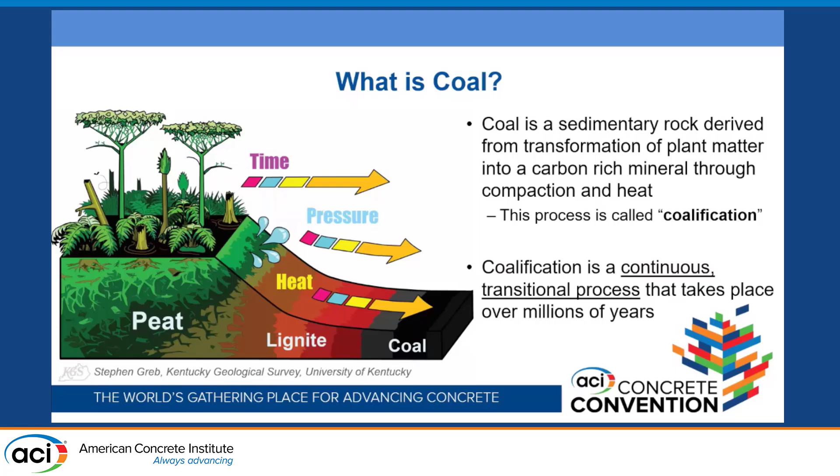The important thing to note about this process is that it's continuous. What I mean is, when you look at coal development, its age and its point in the process of coalification changes the physical and chemical nature of the coal. We break down these different stages into categories called ranks. Lignite is the lowest rank coal, all the way up to anthracite, which is the highest rank coal.

Those categories are defined differently internationally, but here in the US we tend to rely on the coal's calorific value as the determiner of its rank. So why do these different ranks have different calorific values, releasing different amounts of heat when ignited? It's because these different ranks of coal also have different fixed carbon contents. Lignite will often only have 30 to 40% fixed carbon, whereas anthracite can have up to 80%.

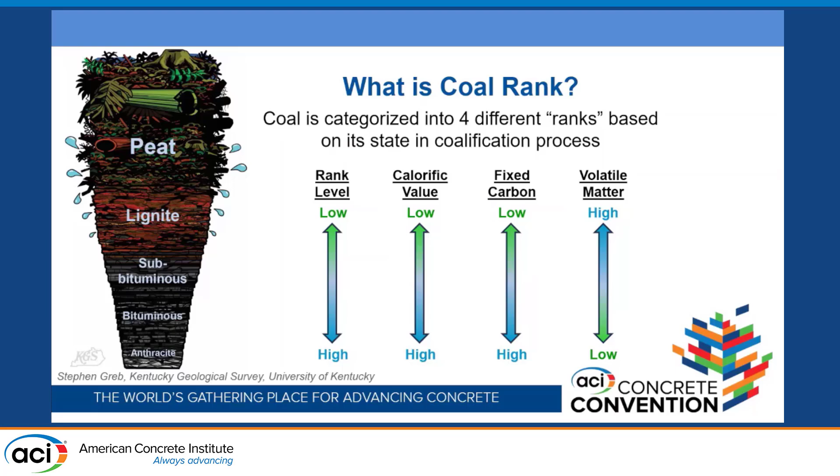Coal is formed through the decaying of organic plant matter, which we understand is carbon. If lignite is only 40% carbon, what's the other 60%? Well, in coal terms, that's often referred to as the volatile matter. But in our world, the term that might make more sense when thinking about coal ash is that coal is composed of the organic component and minerals.

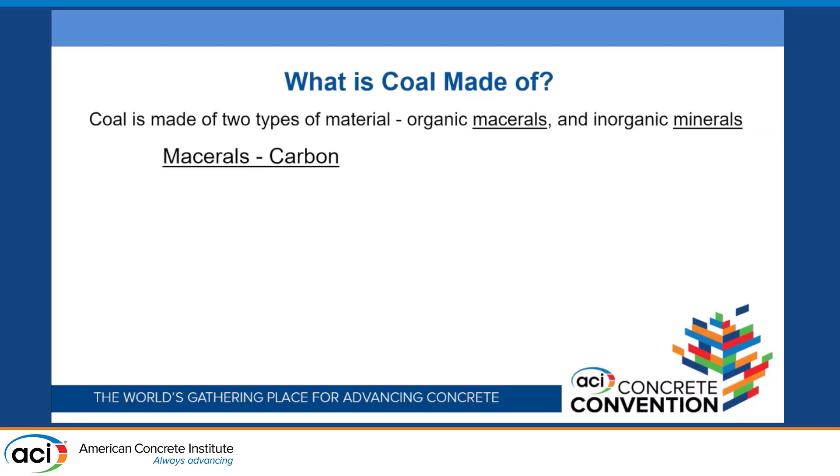The organic component comes from your plant matter—it's the fuel, it's what burns. Depending on what kind of plant matter it's formed from, it has different names and categories. That's interesting, but not useful for this discussion. The minerals are really the important part of the coal to keep in mind when thinking about coal ash.

Those minerals in coal, the non-plant matter part, come from one of two different places. They can either be native to the coal itself, to the coal seam—think of this like the soil that those plants were growing in.

Like the clay in those soils, or the silica that makes up the cellulose within the plant fibers themselves. Or those minerals can be diagenetic, they come from a secondary source. So seawater flooding the peat bogs, depositing salt, notably where chlorides come from, when there are some ashes that have chlorides. Or glacier movements that bring shale and other minerals into the coal seam.

The reason why the minerals are the important part of this discussion is because this is where the coal ash comes from. The minerals in coal aren't combustible, they're not going to burn. So when you burn coal, what happens to them? They turn into coal ash in a process we'll discuss in a moment. And what's particularly important is that the type of minerals that are there, and the composition of those minerals, is the origin of the type of coal ash you get.

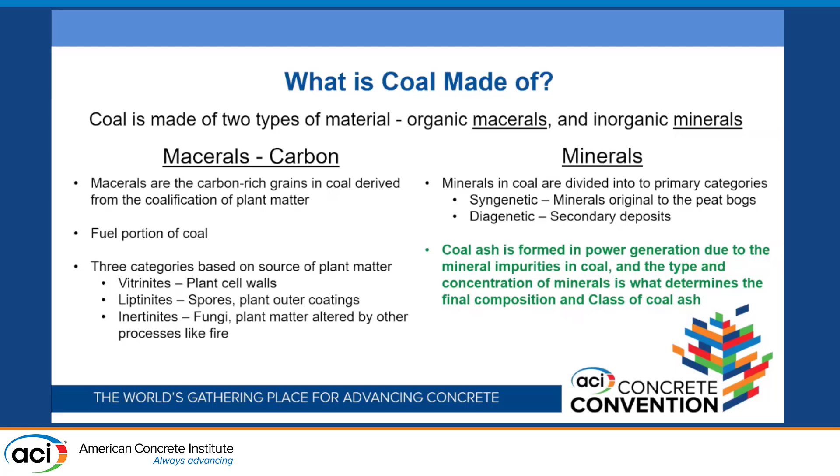So if you have limestone in your coal seam, that's high in calcium, you're going to have a Class C ash. If you don't have any volatile minerals, if you just have clays, the coal will likely turn into a Class F ash. So let's piece all this coal talk together and remind ourselves why any of this matters.

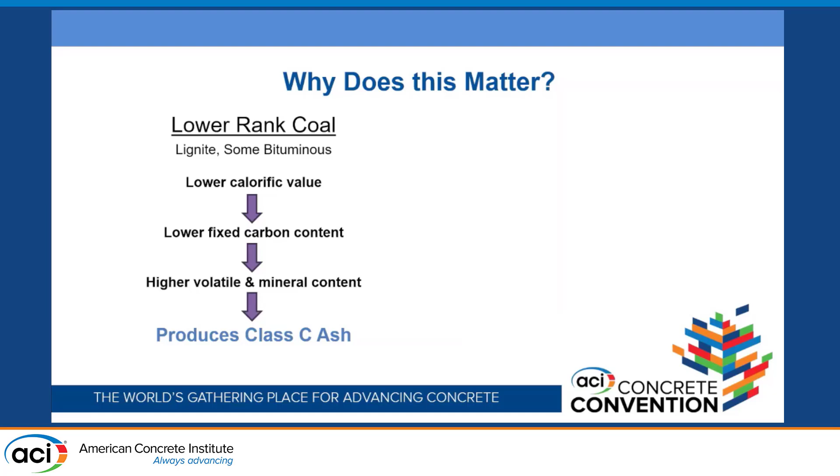If you have a lower rank coal, it's lower ranked because there's a lower calorific value. It has a lower calorific value because it has a lower carbon content. And instead of carbon, it has a higher volatile mineral content. Those coals tend to produce Class C ashes. Class C in our terminology is a higher calcium coal ash. So the calcium is there because it came from the volatile minerals that were there instead of carbon.

Higher ranked coals, like some bituminous and anthracites, have a higher calorific value because they have higher carbon, and because of that they have a lower volatile mineral content. Therefore the ashes produced from them are a Class F ash. So that's the story of coal.

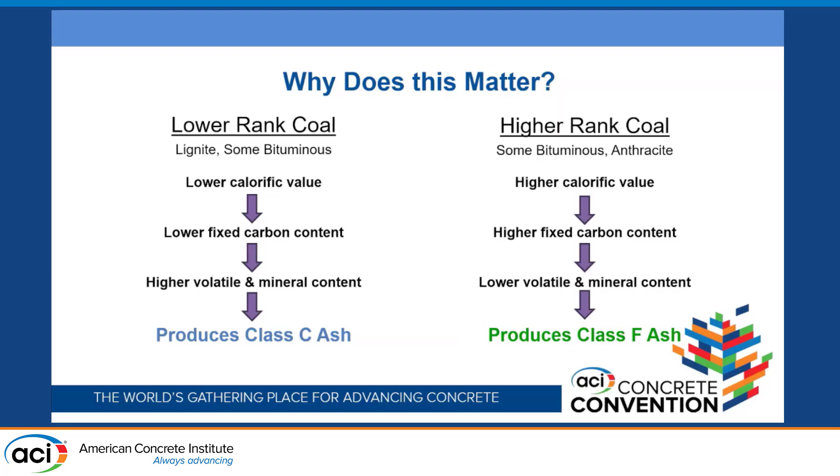Now let's talk about what is coal ash. Well, I started hinting at it already, but let's slow down just a little. So for this, I'm going to reference ASTM C618's definition.

C618 is the ASTM specification for coal ash and raw or calcined natural pozzolan for use in concrete. Previously, this specification was fly ash for use in concrete. As of 2023, this change was made and this definition was added: coal ash is fly ash and bottom ash, resulting from the process of combustion of ground or powdered coal, obtained either from current power plant production or harvested from landfills or impoundments. So a big definition, a lot going on in it.

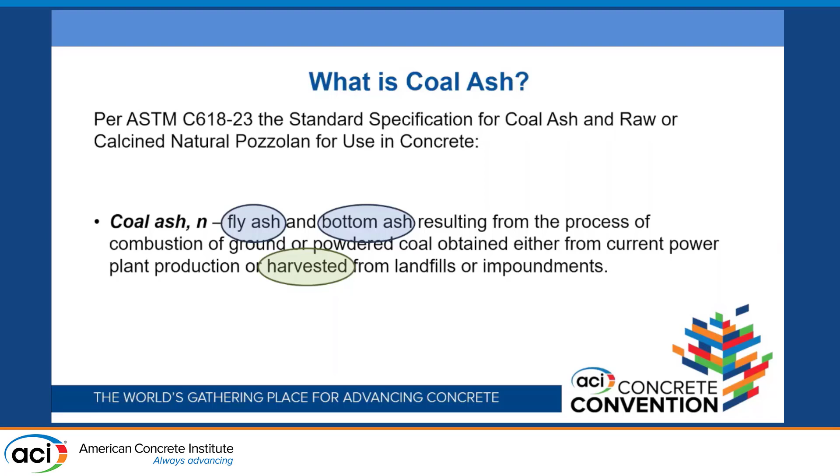Coal ash is now the name of this parent category. Within coal ash, there is fly ash and bottom ash. And coal ash can be used in concrete whether it came from a power plant directly out of combustion or if it were harvested from disposal.

So if we're going to talk power plant and the origin of coal ash, and we're going to talk about fly ash versus bottom ash, and how all of these come to be one thing we call coal ash, we need to talk about power generation.

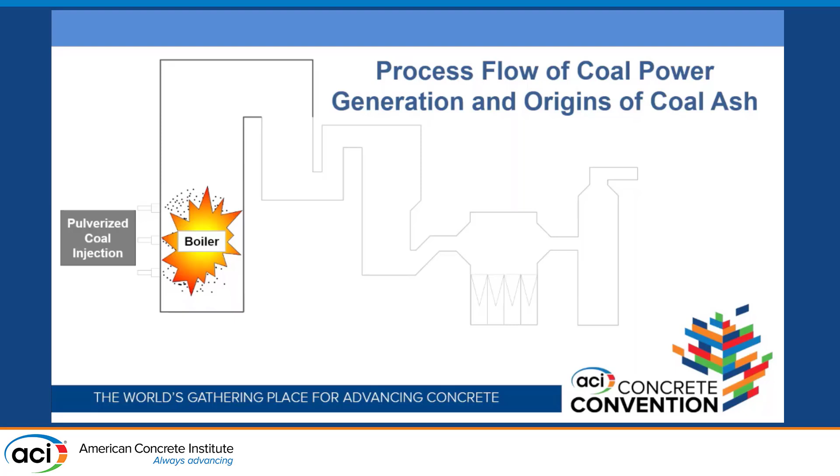Let's see it again. Very satisfying. So this is combustion. We all remember combustion from grade school, it's carbon and oxygen and a spark. You do this to create heat. Why do we create heat at a power plant? In order to heat up water that is in boiler tubes, to turn it to steam, to turn a turbine.

That's power generation, I'll let someone else talk about that. Combustion, for us, we care about what happens aside from the heat. So one part of combustion is creating flue gases, notably water and CO2 are the predominant ones. We all know the concerns regarding CO2 in the atmosphere.

NOx and SOx gases are your other two large categories within flue gases. We're pointing these out because they're relevant to fly ash and coal ash.

What else is going on in this combustion? I harped all about these minerals, right? Some of them volatilize—that's where some of the SOx gases might come from, for example, from pyrite volatilizing and the sulfur component converting to sulfur dioxide. But a lot of these minerals don't volatilize, instead they melt. This combustion is happening anywhere from 1,300 to 1,700 degrees Celsius, so these minerals are melting and fusing in this massive fireball.

So what happens? They melt, they fuse into a glass, floating in suspension. Some of these molten fused glasses are heavy, and so they fall out of the air in the boiler to the bottom. That is where bottom ash comes from. We are very creative in the way we name these things—it's bottom ash because it fell to the bottom.

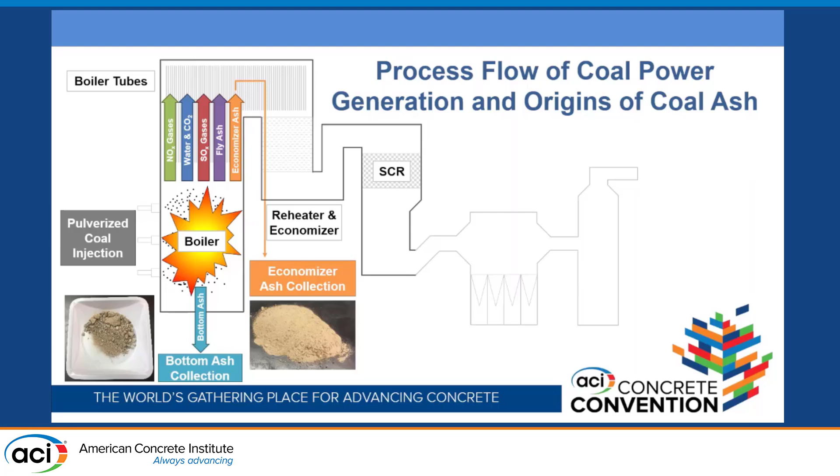Next in our process flow is the SCR, selective catalytic reduction. This is basically the catalytic converter in your car. The point of it is to take the NOx gases and bind them. The way that happens is before the SCR, the utility injects ammonia into the flue gas stream. That ammonia will react with the nitrous gases on the surfaces of the SCR to bind to the NOx.

Why do we care? Some of you may be aware that sometimes ammonia can be in fly ash. There is a C311 test for testing the ammonia content of fly ash, all based on power plant operations. If excess ammonia is used more than needed for NOx removal, that ammonia can end up in the fly ash. I'm pointing this out because sometimes in harvested plants you'll find ammoniated fly ash in certain areas—that is not native to the fly ash, it's a byproduct of power plant operations for flue gas treatment.

The next part is the ESP, which stands for electrostatic precipitators. This is an array of vertical plates that are charged and perforated—perforated so the flue gas can pass through easily, and charged so the fly ash can statically attract to the plates for collection. They're occasionally pulsed, and the fly ash will fall to the bottom. So this is where we get fly ash from.

Now we've got all of our different ash collections: our bottom ash from the bottom of the boiler, our economizer ash from earlier in the system, and our fly ash.

The last part we still need to talk about is SOx removal. There are still sulfur gases in the flue gas at this point. There are several different desulfurization technologies—this is just one, a very common one. It's called a wet scrubber, where the flue gases are pumped through a lime slurry so the sulfur reacts with the calcium to form gypsum, anhydrite, bassanite, calcium sulfite, and a variety of other hydrates.

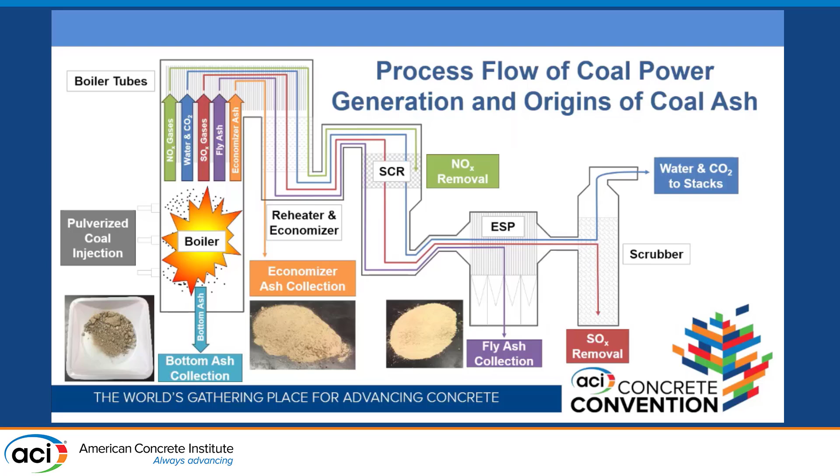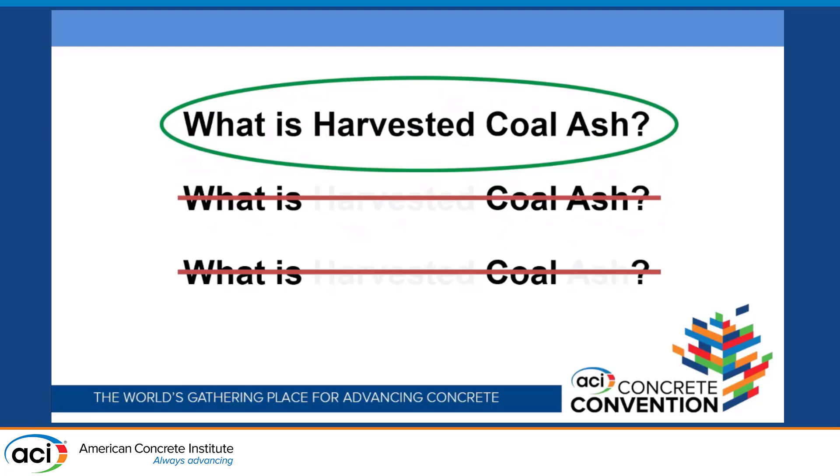So that's coal ash, that's where it comes from. It starts as minerals in coal. Those minerals get injected into the boiler, they melt, they fuse, and they go to different places. So now we can say what coal ash is, what is harvested coal ash.

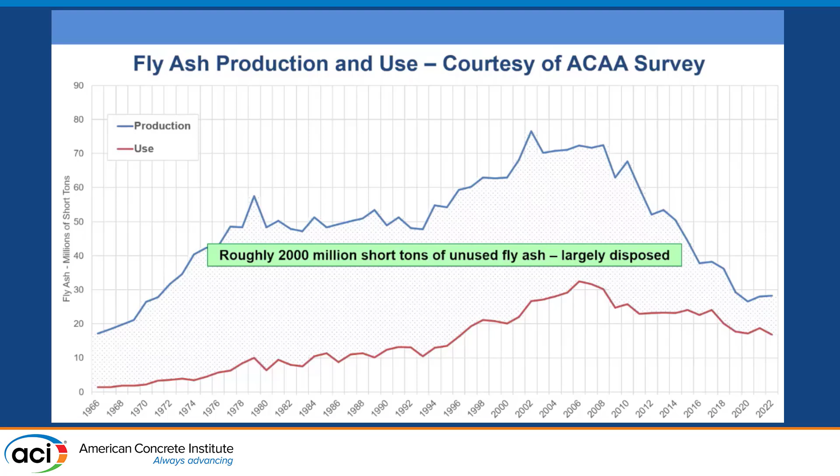This gap between production and use—that fly ash didn't disappear, it went somewhere. Largely it was disposed of in landfills and ponds. There is at least 2,000 million tons of it in disposal. Looking at the red line for how much is used every year, if you're lucky, up to 30 million tons in a year—2,000 million tons will go a long time. So now we're finally getting to the meat of this, about harvested fly ash.

So how is this ash disposed of, the ash that's produced but not sold? Largely in two types of impoundments. The first, often referred to as stacks, is what you'll often just hear called a landfill. In this type of impoundment, the ash is removed from the plant, trucked over to the prepared site, where it's deposited and compacted in lifts. The ash is normally conditioned with about 12 to 20% moisture for dust control and for compaction.

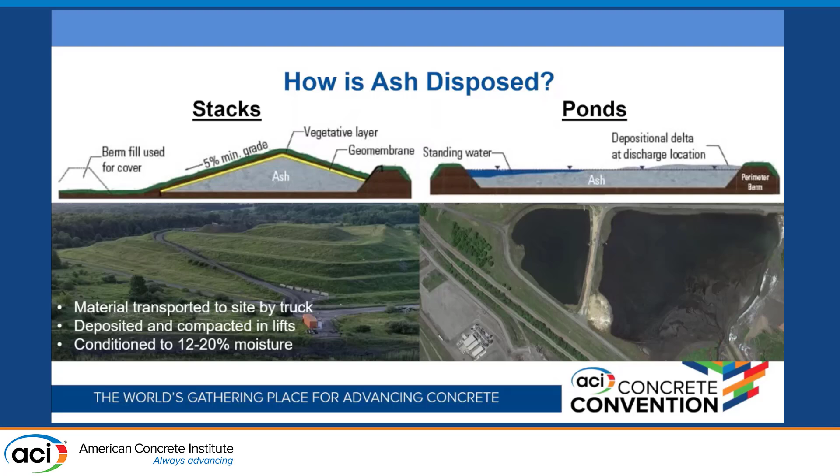The other common option is a pond, where it's exactly what it sounds like. The fly ash is mixed and sluiced with water into a pond, into a pit, where it'll then flow out and settle.

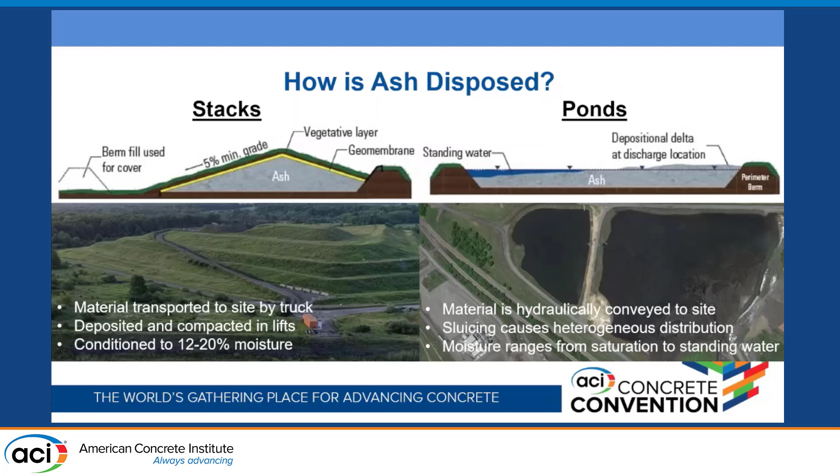That said, what all is in these types of deposits? We already talked about how coal ash is the category that contains fly ash and bottom ash. What else is out there? Well, it's all the above. Depending on the utility's operations, depending on how many landfills they wanted to manage at a time, there are some cases where there will be landfills that utilities decide to only put the fly ash, then a different spot where they only put the bottom ash, and another spot where they only put the FGD solids. But it's also common that there will be commingled landfills.

Here's an example of a landfilled ash. The sample on the left, labeled dried, is just sampled straight from the deposit. On the right-hand side is when we screened it on number 20. You can see there's a combination of materials. The oversize here is a combination of bottom ash particles, or it could be agglomerates of fly ash that, because of the moisture conditioning, bound together. It can be a combination—there could be some gypsum in there too.

We'll hear a lot more from the other speakers about the exact processes used to take material that looks like this and make it better quality. But this is the starting point—this is what we have to work out and figure out.

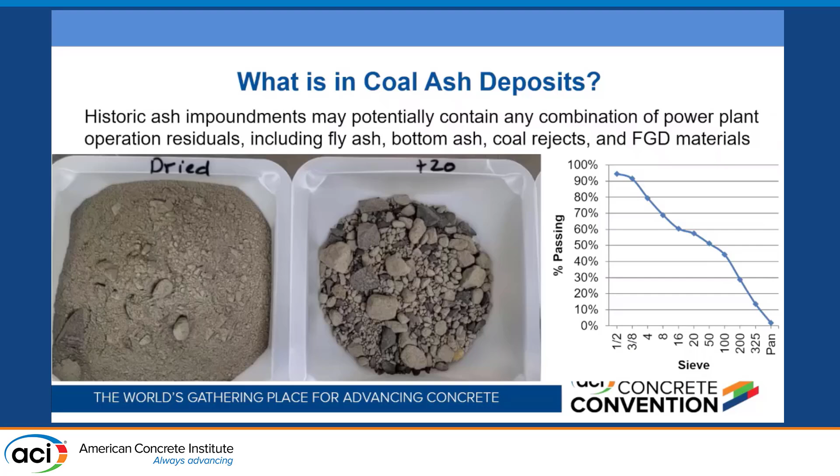As an ash marketer, what this means is when we approach one of these harvesting opportunities, they each have to be approached with their own set of due diligence, because every landfill and pond is different. The other thing to keep in mind is that these power plants could have passed through multiple different utilities' hands over the years, and those different utilities might have different operational practices. Also, I made y'all listen to all about coal and how the coal influences the fly ash that's produced, or all of the coal ash.

A power plant could switch the coal it was burning 5 or 6 times in its history, which means the ash put in their landfill will change in composition with depth, with area, all these sorts of things.

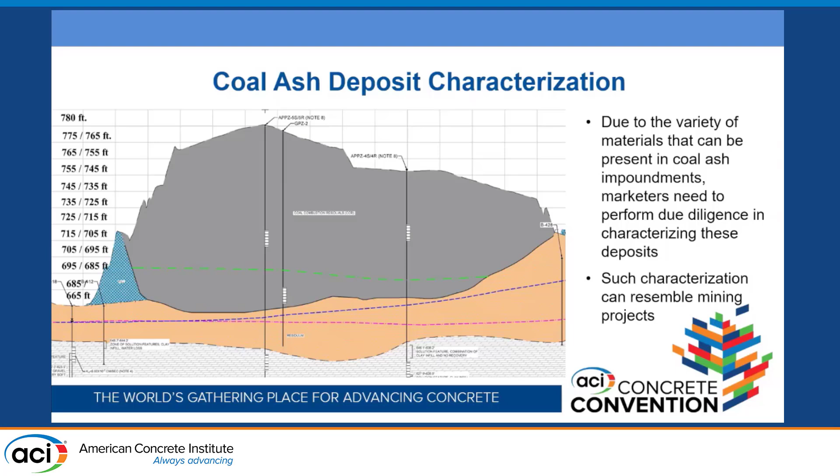So as marketers, we have to go to these sites and treat them almost as mining projects, where we will lay out grids of boreholes, go through them, and drill and pull out samples at various depths.

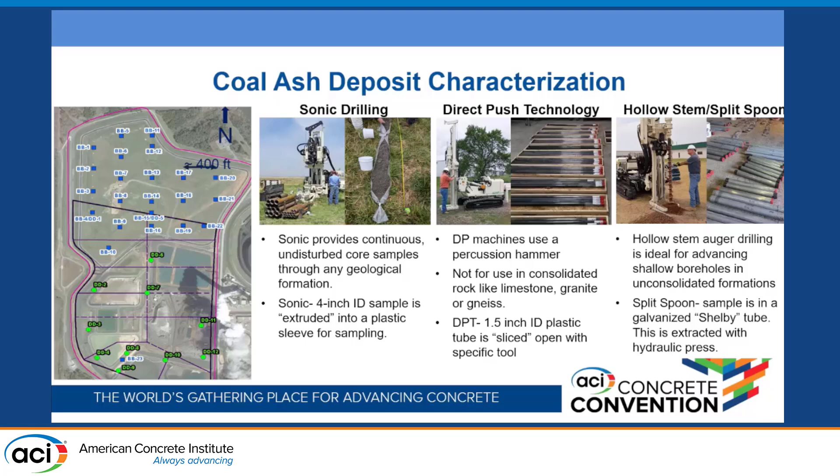There are multiple different drilling technologies depending on the project and what makes the most sense. Ideally, sonic drilling really helps preserve sample integrity. Direct push is great, but you really need a softer material to work with. Split spoon works well for shallow depths but is harder to manage at deeper depths. The augers don't like to dig down as deep.

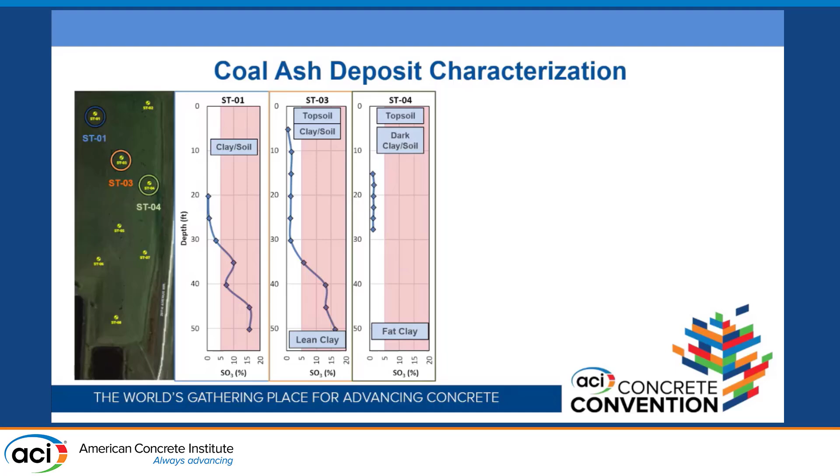In some boreholes, we see areas where it looks like there might be a layer of gypsum. In other areas, it looks just fine all the way down to 50 feet. So we do this kind of boring so we can map the landfill, appropriately plan the right engineering technologies needed for the site and facility we're going to build, and help us in our quality control planning so we can figure out how to approach these areas—do we start here and then move to there, all that sort of thing.

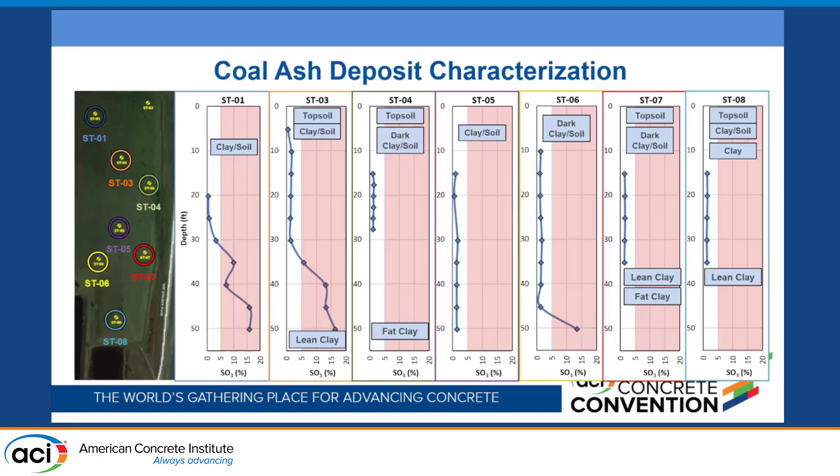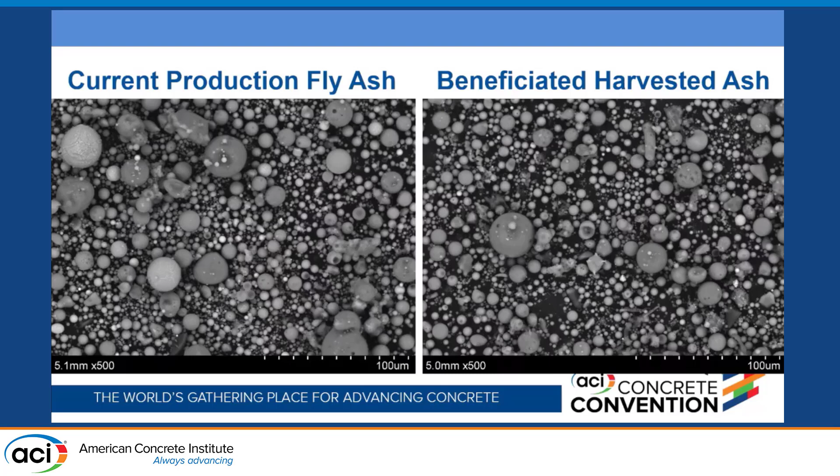The end result of this, ideally, is you end up with a product that looks, smells, maybe tastes—I don't know—very similar to the current production power plant's ash. At a quick glance at these two electron microscope images, you'd be hard-pressed to know which one was which.

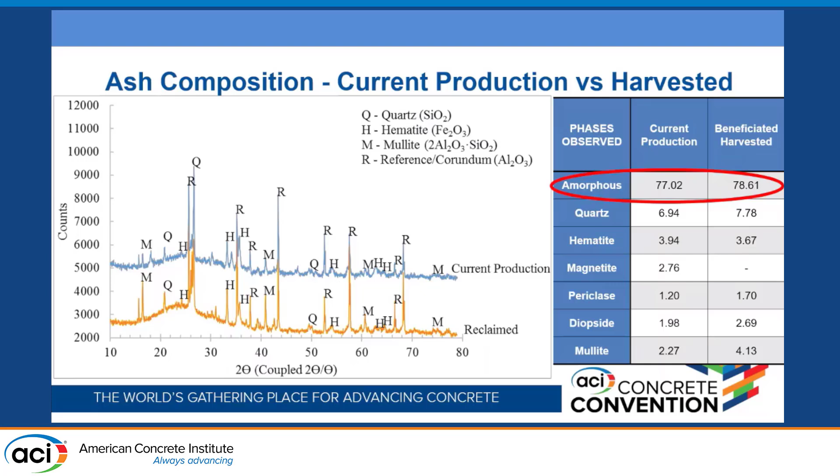In various different compositional analyses, you'll have a very hard time telling which one is which. There's a lot to talk about—amorphous content is not the same thing as reactivity, but when you take a look at a harvested versus a production ash from the same facility, seeing that that hasn't changed is a good signifier. It tells us they're not changing chemically too much, they're not leaching too much.

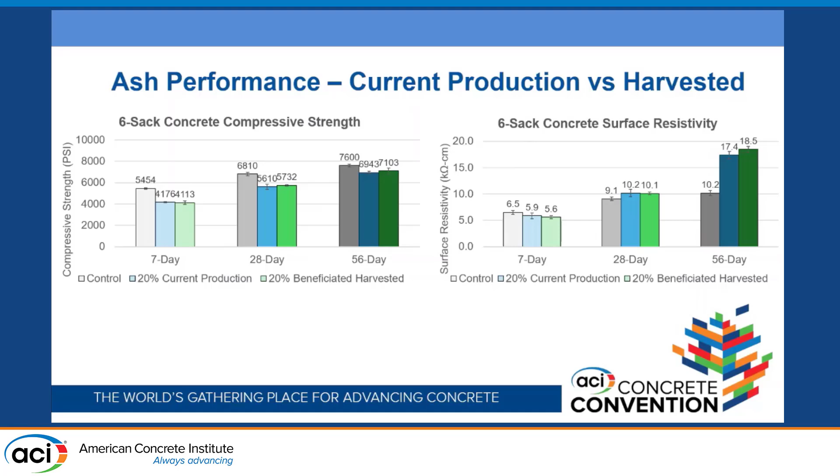And then when we actually make concrete with these materials, you can see again that fly ash or harvested coal ash and production coal ash from the same facility, if beneficiated properly, give nearly identical results, if not identical. We're still seeing in the surface resistivity measurements that we are achieving that pozzolanic reactivity that people appreciate in fly ash.

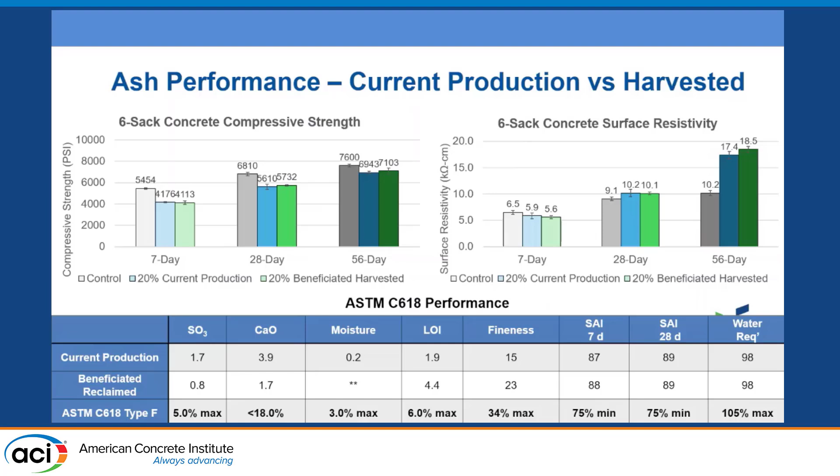In terms of ASTM C618, that's our industry's version of a mill cert—you've heard me reference the name several times. You'll see, again, nearly identical strength performance and water demand. There will be differences sometimes; here you'll notice a slight fineness increase and LOI increase, but that's managed as part of our quality control and manufacturing levers. We'll hear a lot more about how that's happened from other speakers.

So how do we wrap this up? Harvested ash starts as coal ash. Coal ash starts as the mineral impurities in coal. Their composition dictates the kind of ash you get. When it's ignited in the boiler, they melt and turn into what we call ash. Coal ash is now the industry term broadly used as the collective term for fly ash and bottom ash.

Coal ash that was historically not used was previously disposed of largely in stacks and ponds. Every one of these stacks and ponds is a little different because of the history of the pond, the history of the operations, and the history of the coal burned. So marketers like us have to approach each one as an individual, unique project. And then, once beneficiated, the ash from these landfills and impoundments should perform the same as your straight-from-the-power-plant coal ash.